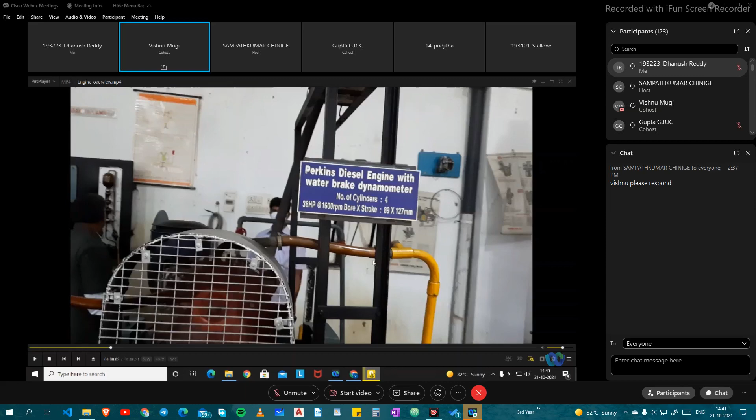No, nothing is changed. For me, your screen is only visible. Engine just started. Sir, is the audio coming? Reduce the volume, reduce it. Yeah, audio is also coming. You reduce the sound, reduce the sound. Okay. Okay. Just play. Yes, sir.

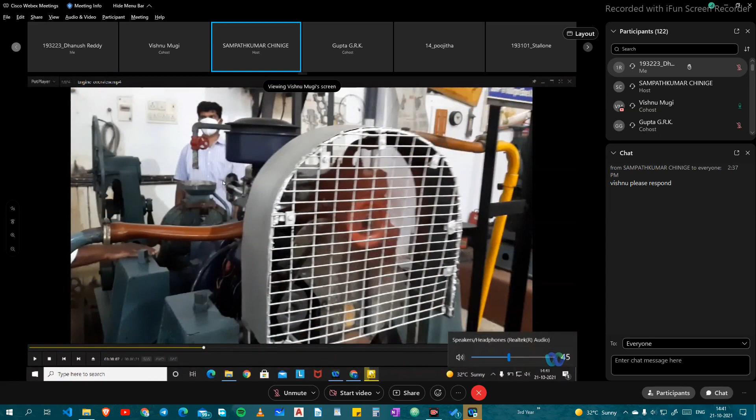Okay, sir, like this I can place it. Yeah, this should be fine, Vishnu. Now, okay, okay, yeah, you can directly place it.

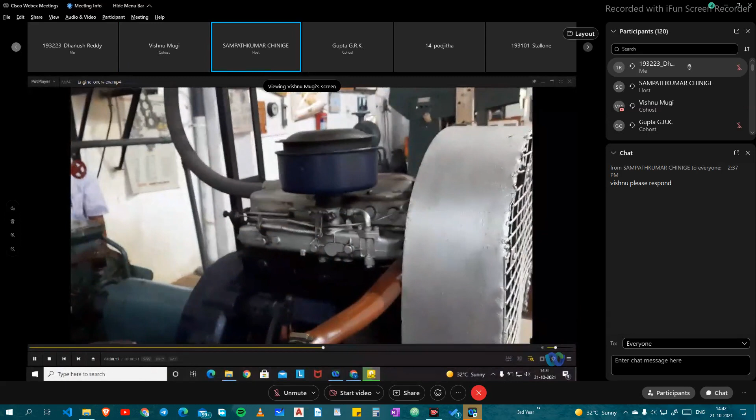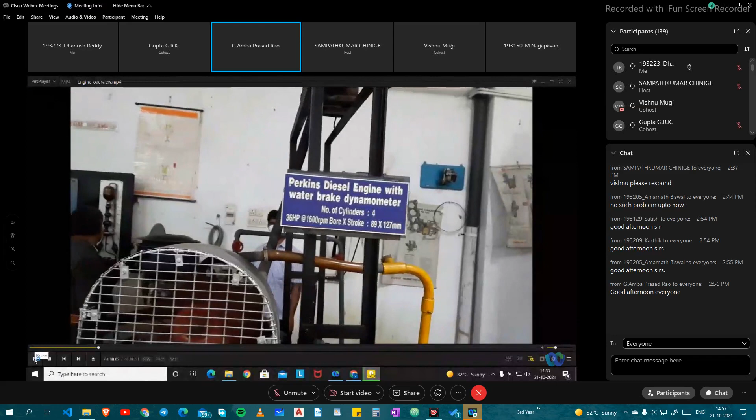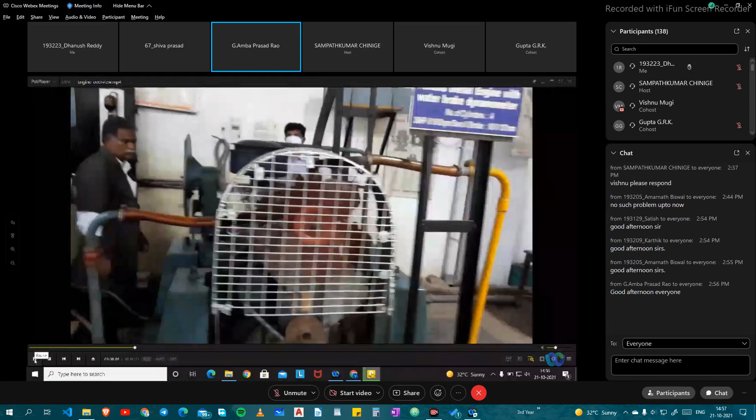Good afternoon. We already conducted an experiment on Perkins engine by performing the test at a constant speed. Multi-cylinder engine performance test on multi-cylinder diesel engine, that is a Perkins engine. So the specialty of the diesel engine I explained you.

The same motive, that's why in variable speed test. So on that, because this is a very automotive type of engine, on that we can also conduct a variable speed test. Variable speed test means its rated speed is 1600 RPM. So that means in the performance test, always we varied the load and tried to bring the engine to rated speed. As you load the engine, speed will fall, and we will compensate for the loss in speed by changing the throttle position. That's what we did.

So now variable speed test is generally performed at different throttle positions. That means you have to fix the throttle, whereas we varied it in the performance test. Now we will fix the throttle position. You can vary the load or speed by varying the amount of water flow in a hydraulic dynamometer, or vary the throttle position. Here we are fixing the throttle position also. So then the only variable for us to vary the load or speed adjustment is through the dynamometer water supply. So actually the manual suggests that it is conducted at a half throttle position.

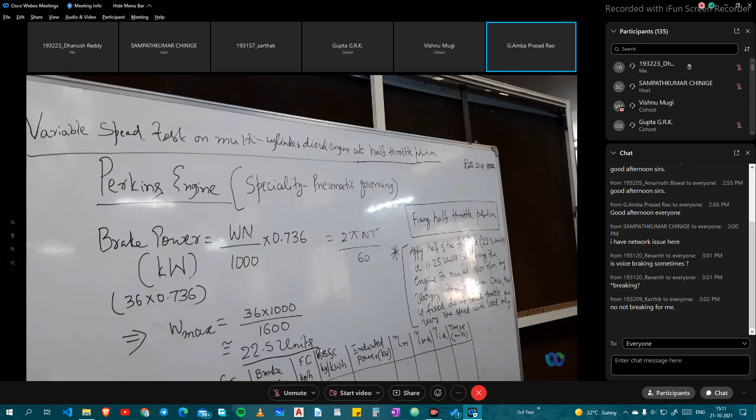If you apply the 22.5 units corresponding to this dynamometer formula, allow the engine to bring it to 1600 rpm by varying the throttle position. That is the pneumatic governing system, where you vary the airflow throttle position. So you are applying this load by controlling the water flow rate, and observing the 22.5 units on the dynamometer dial, adjusting the throttle position until you see 1600 rpm on the crankshaft. Once you get 1600 rpm, the engine is taking 22.5 units, and that is the position corresponding to full throttle.

Now, what do you mean by half throttle? You apply half of that full load, about half of 22.5, which is 11.25. Apply that load by varying the water flow and observe the speed of the engine, adjusting the throttle position until you notice 1600 rpm. Once the engine attains 1600 rpm at 11.25 units, that throttle position is fixed. Do not touch the throttle after this, but vary the speed with the external load only. So keeping the throttle position fixed, you conduct this test.

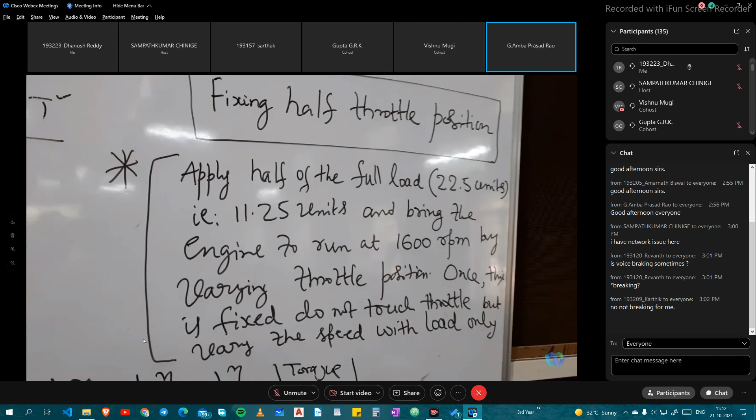What observations do you have to make, Vishnu? The observation table's independent variable is speed. You are running at 11.25 units, allowing the engine to reach 1600 rpm with this throttle position. Allow it to run for some time so that steady load and steady speed are observed. Note down the time for 100 cc of fuel consumption, as you did in the performance test, in seconds. So at 1600 rpm, 11.25 units, this reading is taken.

Once this reading is completed, by adjusting the water flow, you go from 1600 to a lower speed. The load has to be increased, so you regulate the amount of water flow into the dynamometer. You are not varying the throttle position at all, because the same amount of air is taken by the engine. Whatever dynamometer reading comes, note it down. The first reading we maintained at 11.25. The second reading will definitely be higher than 11.25 because the speed has reduced.

You note down the time taken again for 100 cc. At that point you are running at 1500. Now my intention is to run the engine at 1400 rpm. Obviously the engine load will further increase as you bring it to 1400 rpm. Again, see that steady load and steady speed are observed, and at that time note down the time taken for this. Whatever the dynamometer dial shows, this reading corresponds to 1400, 1500, 1300, 1200, likewise.

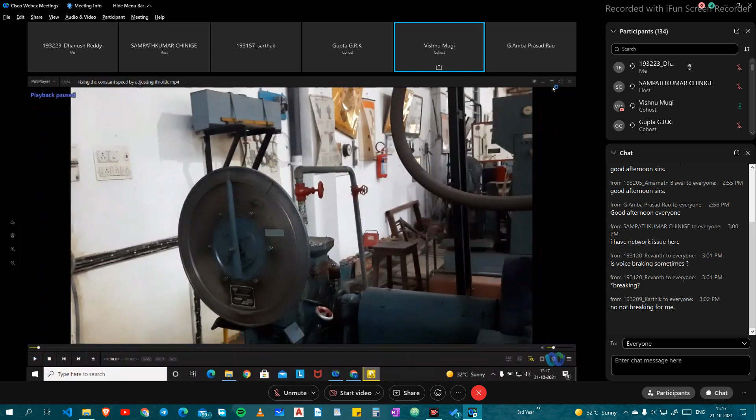So on the dynamometer dial, the water flow, you have fine tuning with the small valve here, and you have larger flow with this. See, you see that there is a water flow started. Okay, please continue.

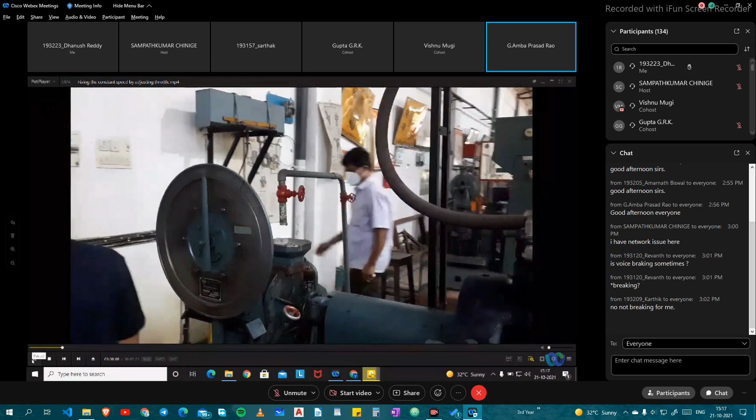Audio is not coming, Vishnu. Yeah, I will reduce the volume.

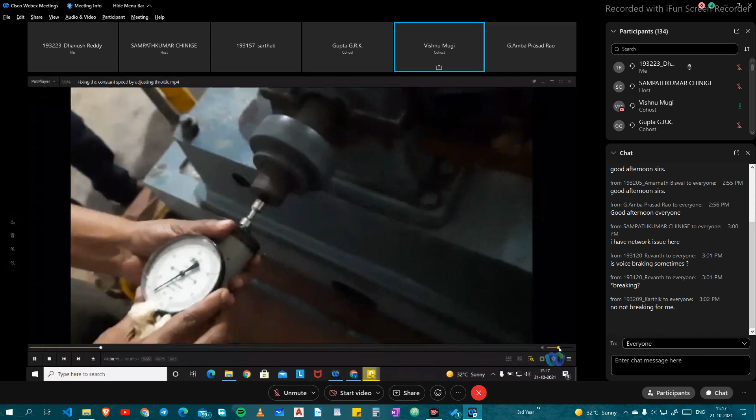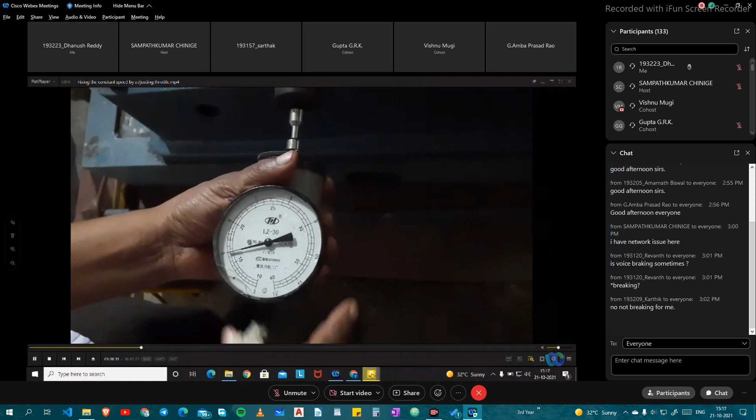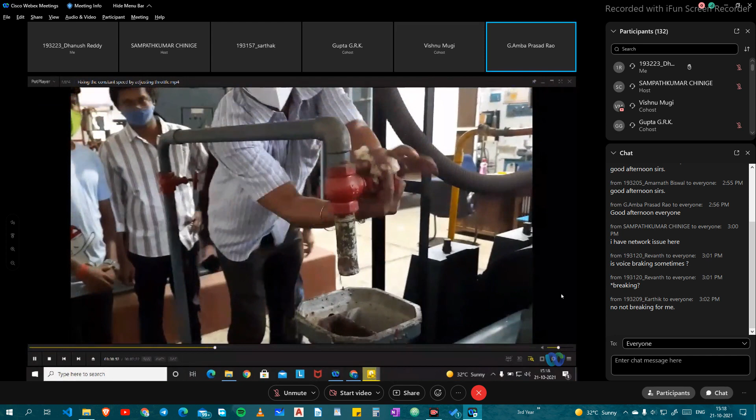Here they adjusted the throttle, sir. That one we didn't. So, zero and 1600. Now we'll try to bring it to our 11.25, because we are fixing half the throttle. No? Yeah.

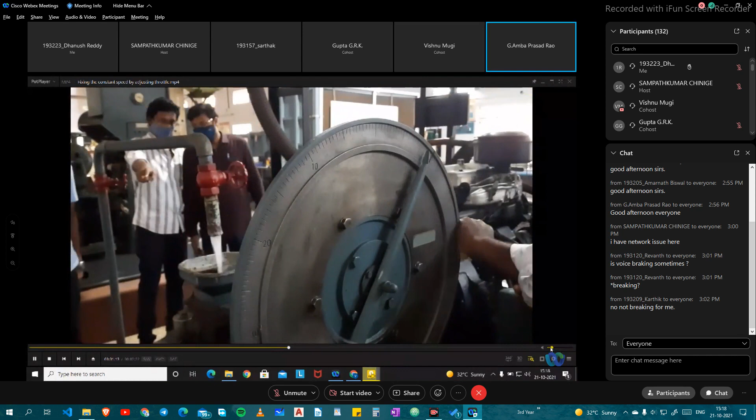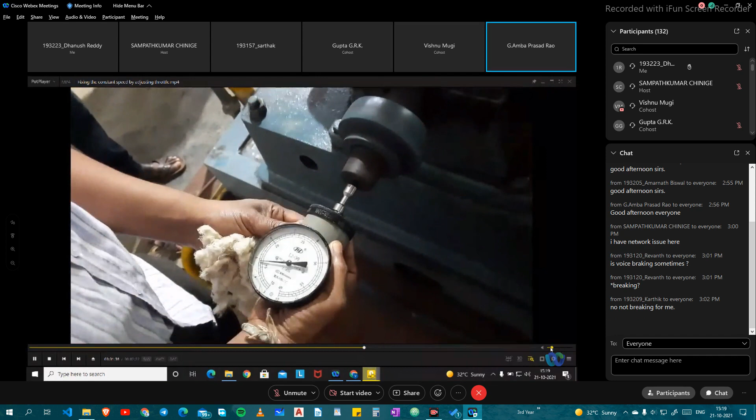1600 RPM. Because he is going on adjusting the water flow and also the throttle position, so that the dynamometer reading will show 11.25 and speed should come to 1600. So once 1600 is attained at this particular load, the throttle is fixed.

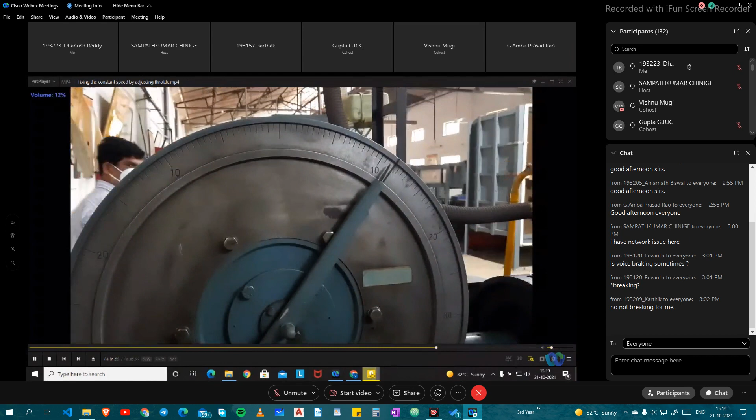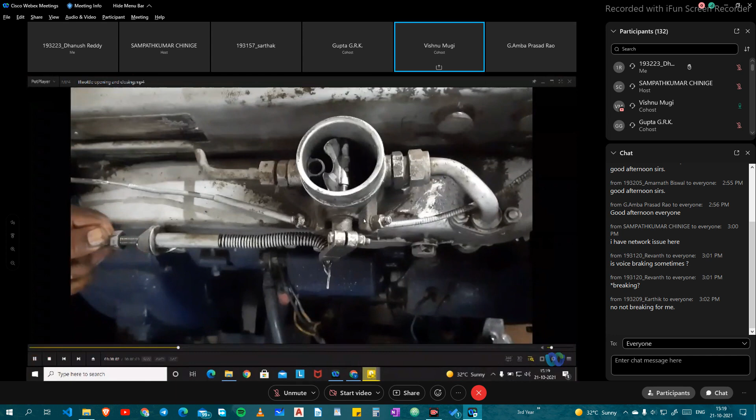Okay sir, this throttle I will show, sir. This throttle, yeah, this is how the throttle position is. You see, it is fully open because once you go back, this is fully closed. So fully open, go back. This is fully open. Little go back.

This is fully open. So with this, because on this the air filter will sit, this is the adjustment of the pressure at the throttle. Sir, is only changing the water flow?

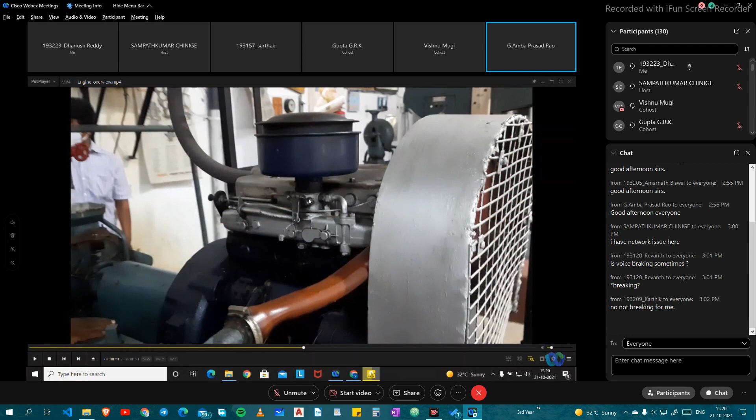You see, observation. This is how this throttle is varied. Yes, sir, here the throttle was there. Yeah, once you remove this blue box, so whatever you observed just now a little while ago, that was seen here in this. So that is adjusted by this lock nut. There is a thread, screw lock nut is there.

So during the remaining part of the experimentation, we are not at all bringing any variation at this point. We are not at all changing this throttle position.

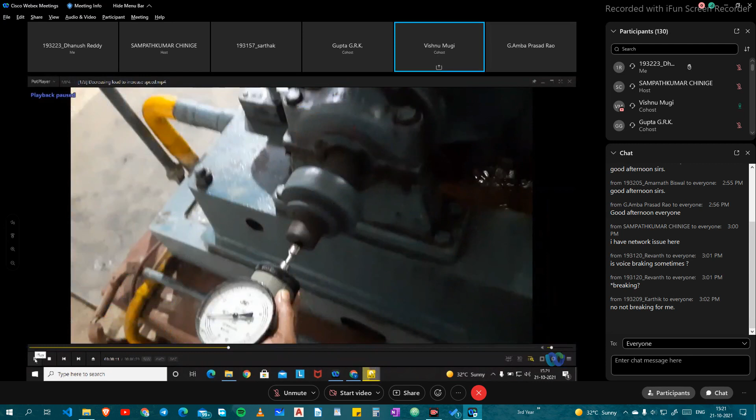Sir, here they tried, you can see here. This is 1600, no? So they decreased the load, sir. They decreased the load, means they are trying to run at a higher speed. Yes, sir, now it's increasing here. The load is also decreased here. Yeah, means they are trying to run at a higher speed.

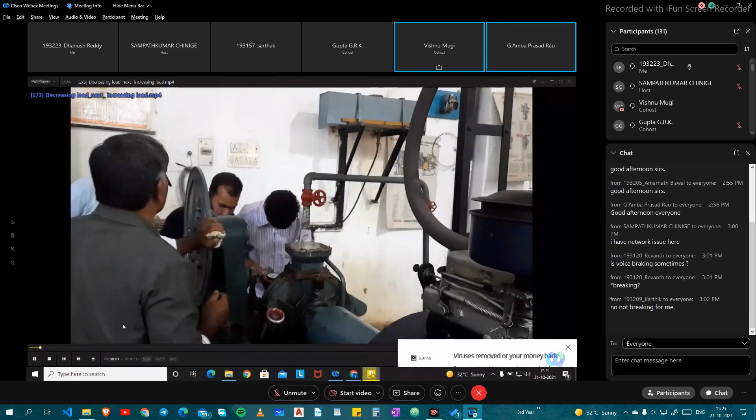Yes, sir, so they are not touching any throttle position. Only amount of water flow is varied. So whatever automatically comes, the dial reading is noted down as a load reading. Next, further they decreased some more load, to see that it will come to 1800. Yes, sir, unfortunately we could not get it at 1800.

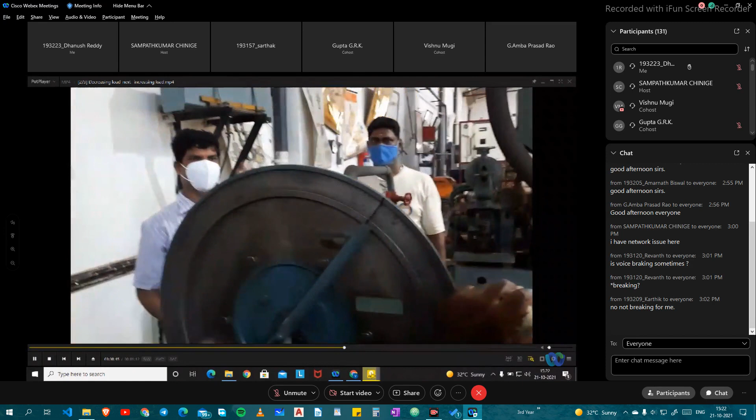Next, they increased the load, sir. Further, decrease the load. It is below 1125. Sir, after that, sir, increased means they are running at 1500 RPM. Yes, sir, 1500, yes.

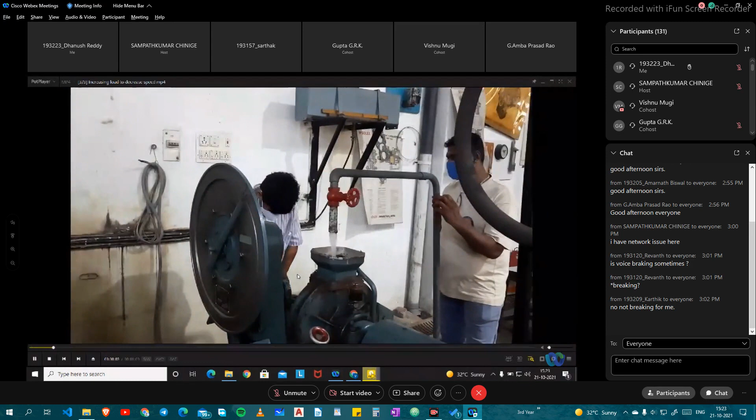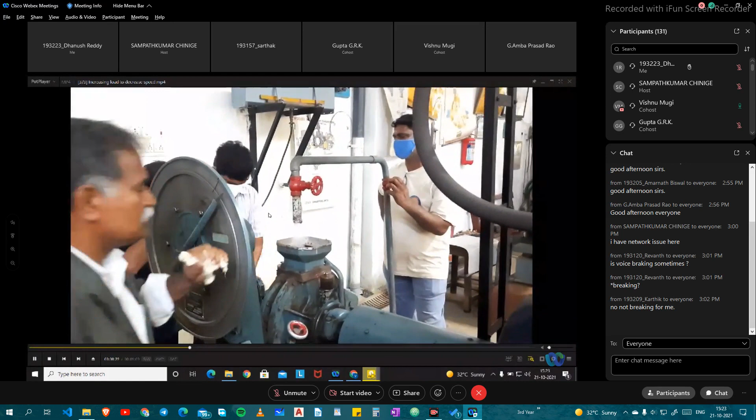This is also same thing, sir, like increasing the load. So they tried to decrease, bring it to 1400, I think. Yes, sir, like that they did actually. We were not successful at 1400. Yes, engine could not come to 1400 steadily, it could not come. It stayed at 1500 only.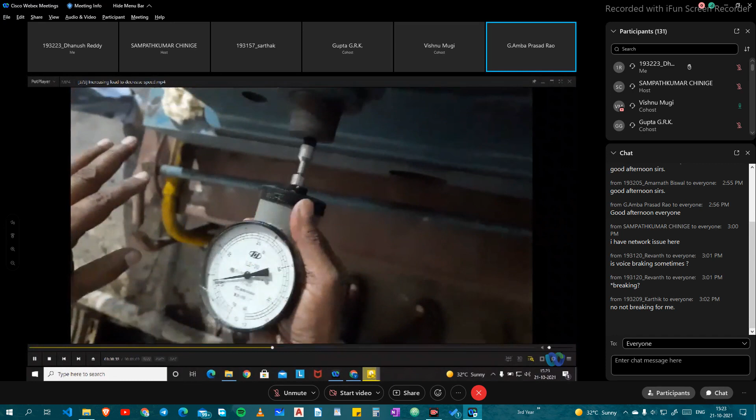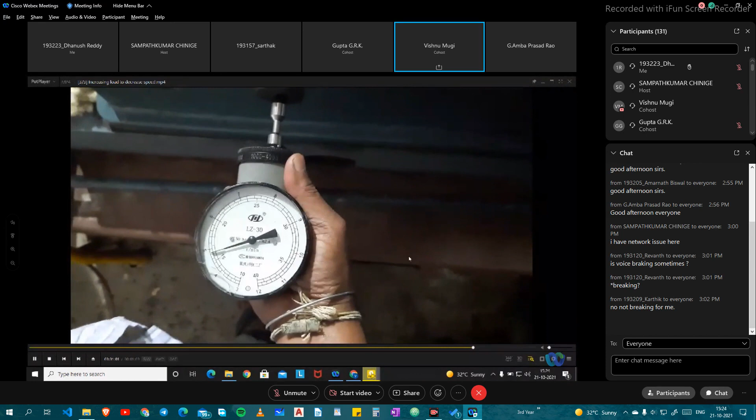So effectively we got 3 speeds, no, yesterday. Yes, sir, 3 we tried, sir. Even we tried others, but that one we didn't get, yeah, steady readings we could not get. Yes. That's why we are sharing the previous tabular column observations. Yeah, any clarifications you want at this point of time?

Karthik, no sir, Revanth. Hello? Who is it? Clear, sir. TA, sir. Huh? TA, TA. Yeah. So, Satish?

Shall we explain the procedure again, sir? Like by showing video again, like first. Because they were for observation, huh? Yes, sir, yes, sir, yeah. You can run, you have full.

Till they noted down the fuel consumption, no? Yes, sir, you didn't show the fuel consumption. Yes, sir, I have shown here. They have taken fuel consumption while noting down the fuel consumption. Yeah.

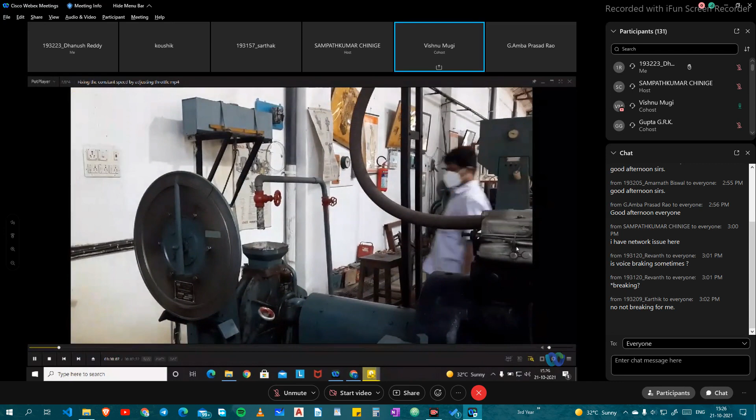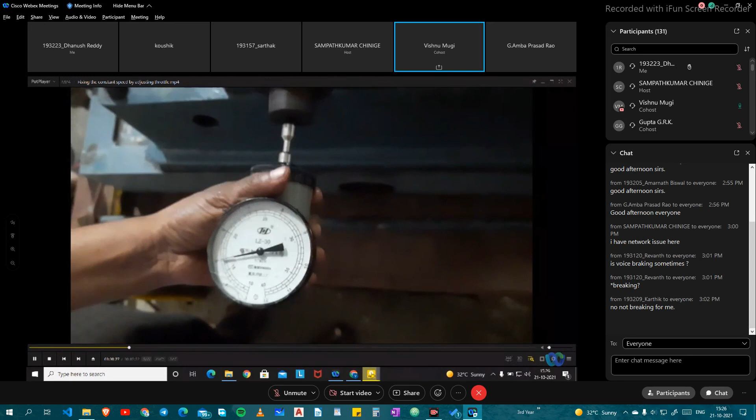This is the first one, sir. Here they applied the load at 11.25 and they fixed the throttle position. Yeah, no, actually while taking the video, you are a little bit confused now where to concentrate. Yes, sir, yes, sir. Here I'm showing the speed only, but at the same time they are adjusting the throttle also, and they are adjusting the water flow also. This is the first one. Yes.

Here he adjusted the throttle position. Next, they applied the load till 11.25.

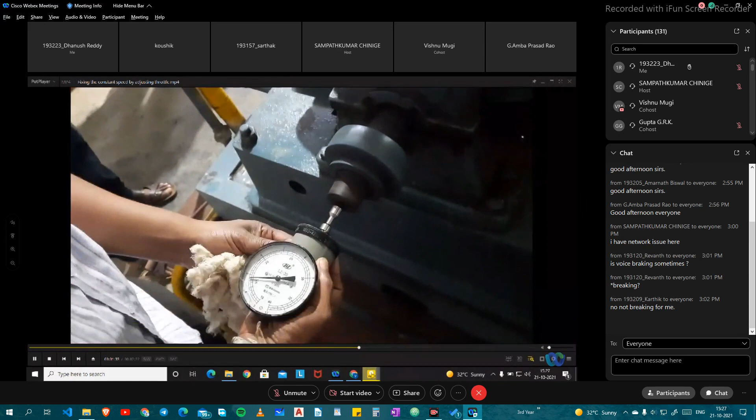So this is the first one, sir. We applied half of the load and fixed the throttle position. The speed is 1600.

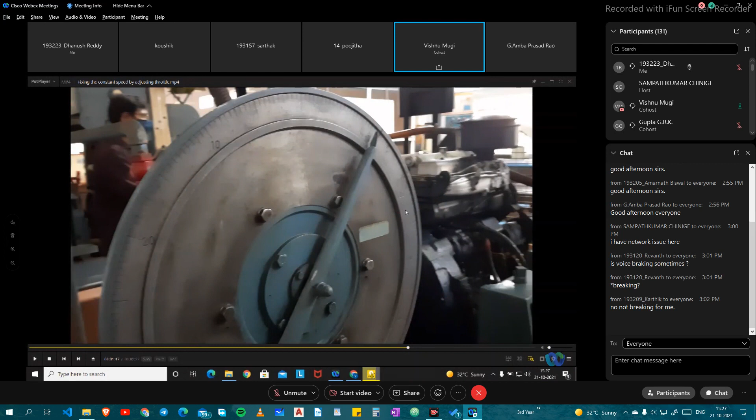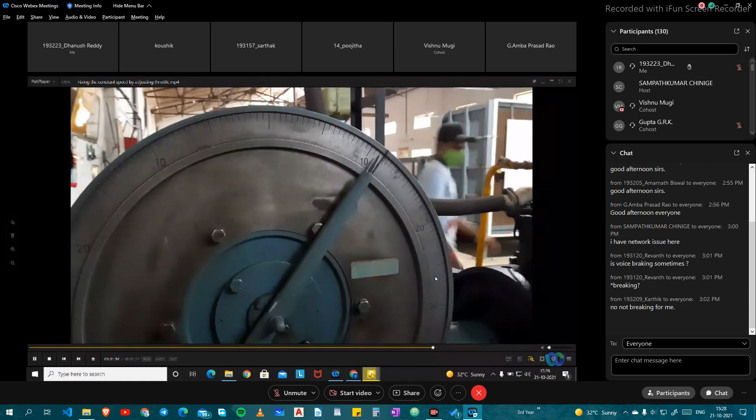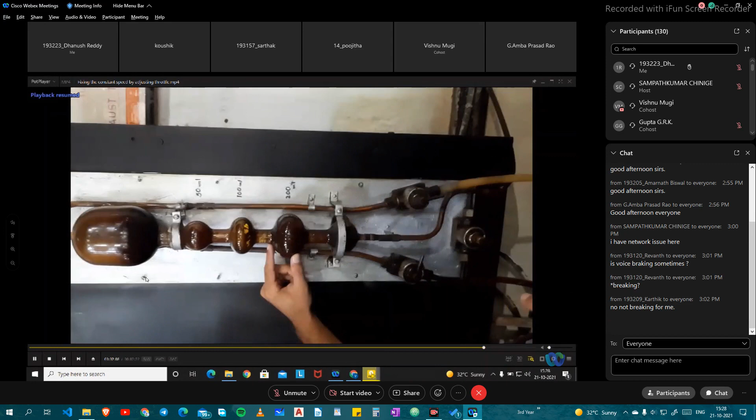And at that time we have taken the fuel consumption reading also, for 100 cc, 100 ml. First one, sir.

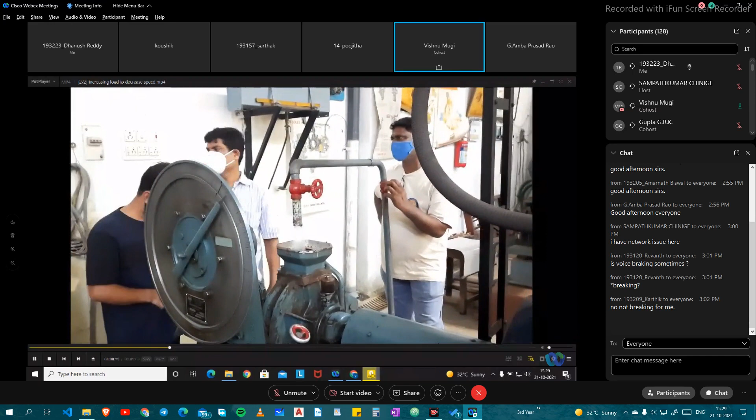Here we increase the load, sir, now. Then the speed is decreased. And at that time we are taking the same fuel consumption also. Yes, where we can see here the load is increased, by water flow only. Yes, sir, by water flow.

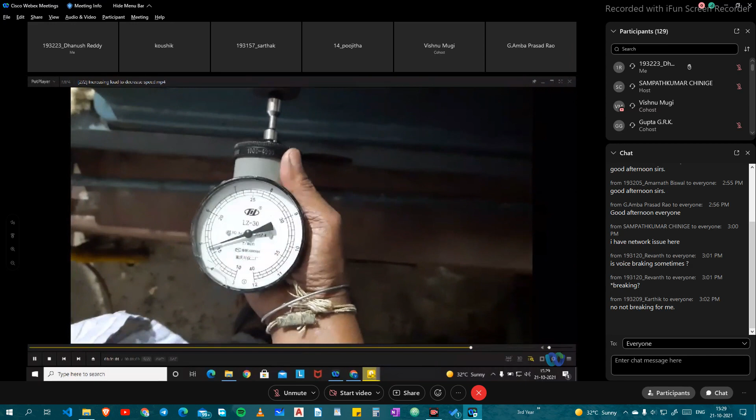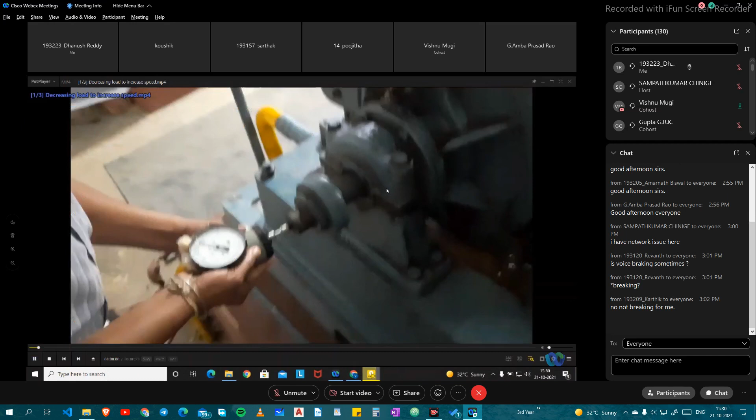Like that we can take readings by increasing the load. Next one, decreasing the load, means bring it at higher speeds. Yes, sir, beyond 1600 speed. Decrease the load, the water flow will be very low, higher than 1600. Here the load is decreased. Correct.

Finally, this is the table. These are the readings we will take: dynamometer reading, time for 100 cc fuel consumption.

So sir has shared the previous class, previous semester readings, no? Has he shared with you? Sir has that one. He told that Sampath sir has the readings, he will see those readings. That is these three readings, sir.

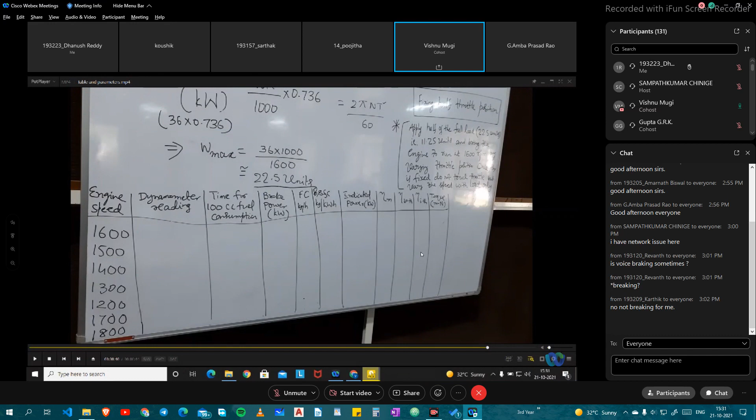Engine speed and dynamometer reading, time for 100 cc fuel consumption. Remaining things students have to calculate, they have to draw the graphs. Sir has also shared with me, let me share if it is available.

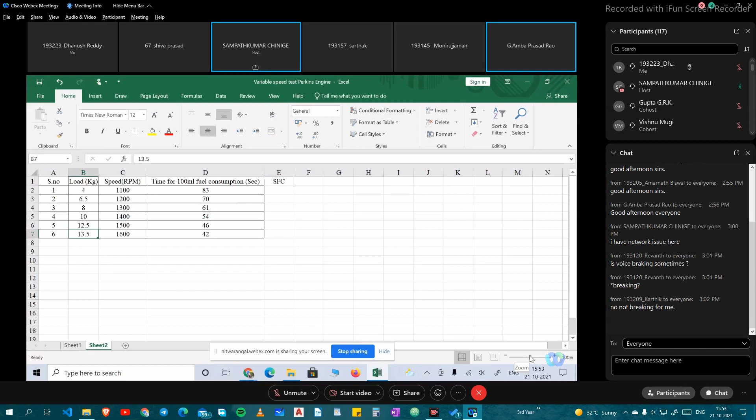Let them do the computation. Let them have some experience of calculation. Okay sir, let them do it. You proceed with the calculations by taking these observations.

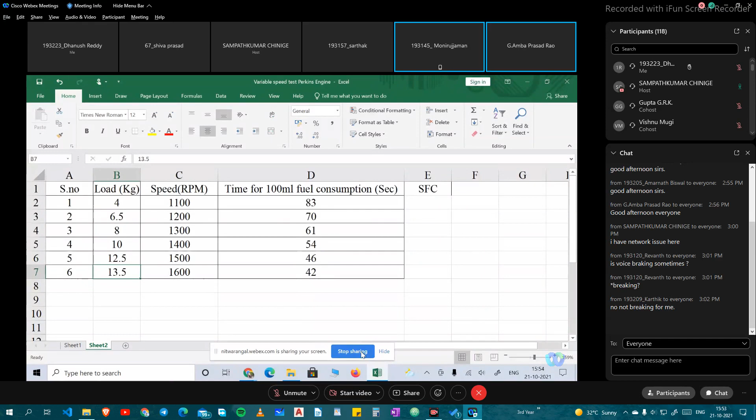Sir, actually in this reading, while decreasing speed, the load is also decreasing. I think we need to change that also — while reducing speed, load should increase, sir. Yeah, that's how I was a little skeptical in sharing that one after seeing it.

Okay, I discussed it with sir. Okay, or if you are comfortable with the three readings, we understand the difficulty of not getting the other readings. Okay, you proceed with yesterday's readings.

Sir, that is reasonable, no? As you increase the speed, load has decreased. As you decrease the speed, load has increased. Okay, so that seems to be reasonable.

Sampath, sir, let them take these three readings from yesterday only, so they can correlate with the theory as well as the explanation we have given to them.

Anybody having any clarifications? If no clarification, then we'll close.